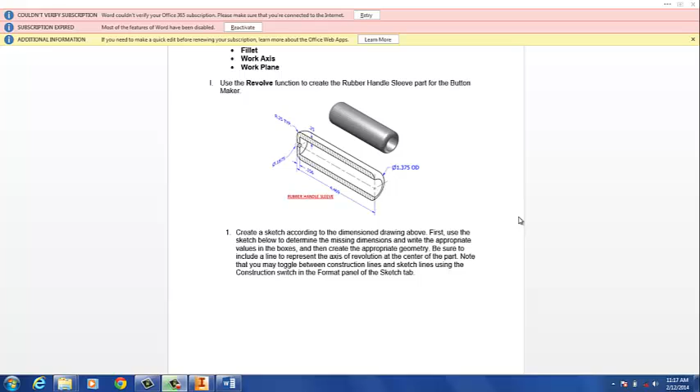Okay, today we're going to look at a tutorial to make the rubber sleeve handle. So I have the Word document here. I get a brief picture here, a cutaway drawing of the rubber sleeve. And then if I scroll underneath it, I get a 2D sketch with some dimensions on it.

So we have 0.156, 4.469, and then you can see there are 3 dimensions that are missing that they want us to solve for. So we're going to go ahead and make this sketch, including this construction line here, which will be the center line that we perform the revolution around. So I go into Inventor,

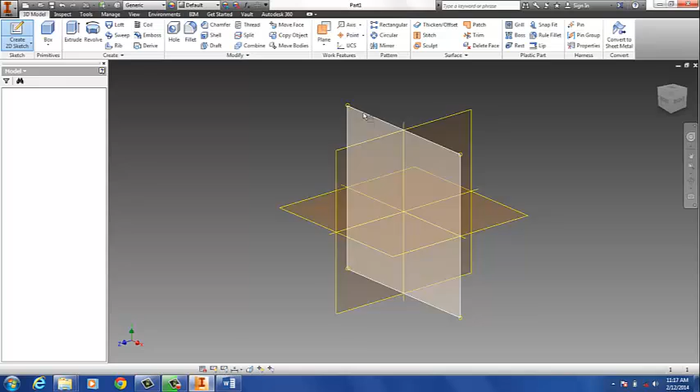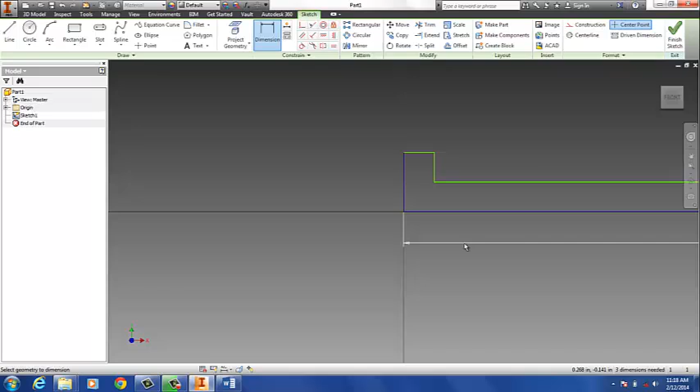and I'm going to create a new 2D sketch, and I'm going to use the line tool and just sketch the basic shape that we saw before. Alright, now I'm going to go ahead and put those dimensions on. So this one was given to us as 4.469. I'm going to hit the front button here so I can see everything. Alright, and up here, this was 0.156.

Alright, now I also need to put that center line for us to revolve around. So I'm going to turn on the construction tool and just put a construction line on top, or rather our center line for revolution. Alright, so there's 3 other dimensions I need to know. We'll go back to the Word document and take a look at those.

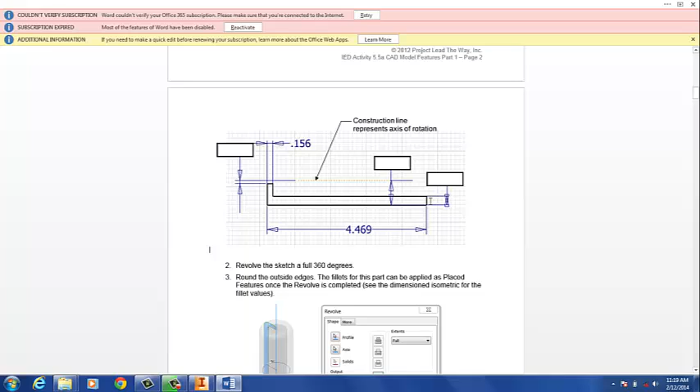I need to measure from that construction line to the top part here, from the construction line to the base of the drawing, and then also the thickness here. So I'm going to take a look at the other drawings, see if we can get those 3 dimensions. So the thickness you can see here is 0.25. Alright, so we're going to add that to the drawing. Then the other 2 I have to do a little math to figure out.

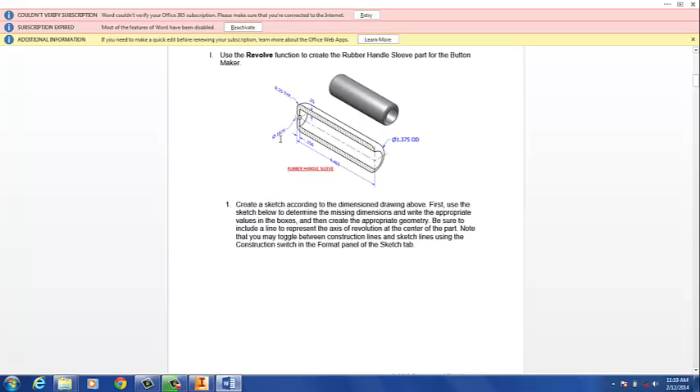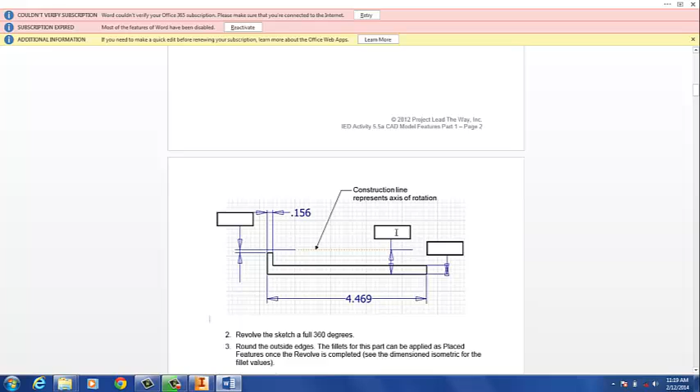Alright, so it's showing me the diameter here of this circle is 0.1875. And so what I'm looking at over here is basically half of the circle. So instead of using the diameter, I'm going to use the radius here. So it'll be 0.1875 divided by 2. Similarly, over here, that circle is what we would get over here. So we get a diameter of 1.375. So I'm going to do the same thing. I'll divide that in half for the dimension there.

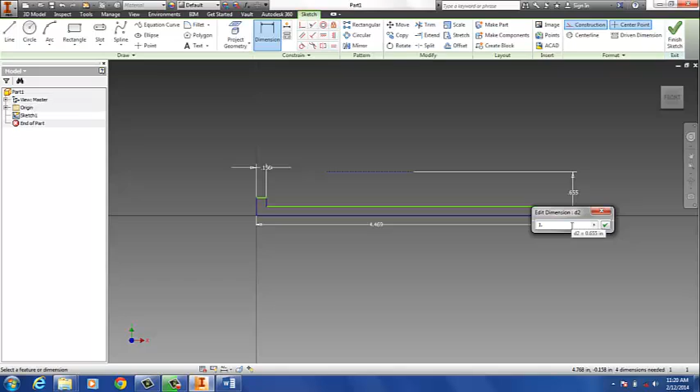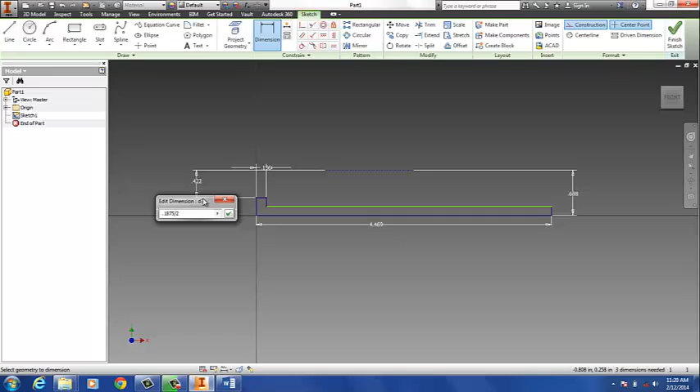All right, so dimension, let's go from our construction line to the base. That's going to sweep out a circle of 1.375 for the diameter. So we'll divide that in 2. And then I'll do a similar between the construction line and the top part here. Alright, so that sweeps out a circle of 0.1875 diameter, so I'll divide it in half to get the radius. And then the last thing I need is the thickness, which is 0.25.

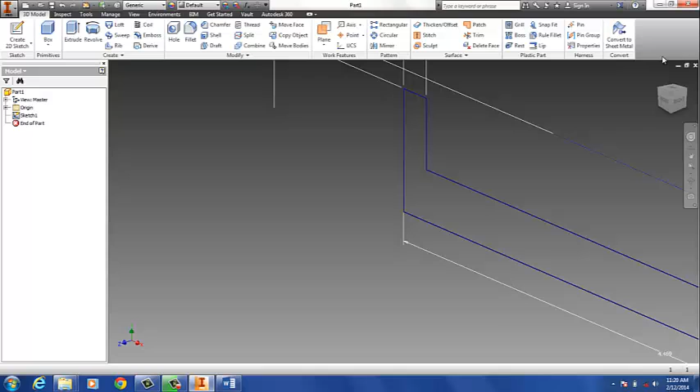Okay, so I now have the profile completely dimensioned, and I'm ready to revolve it, so I finished the sketch. We press the home button to zoom us back out. I'm going to select revolve. There's only one profile, so it selects that profile. I'm going to pull this menu down here.

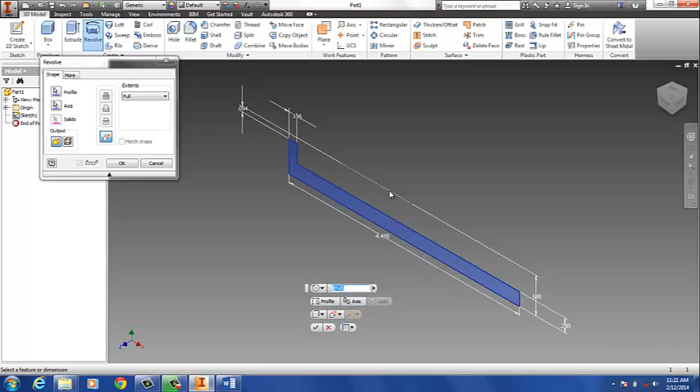Next thing we need to do is select the axis. You can see here it says axis. It's also highlighted over here. And that's why we put this construction line down. That's going to be our axis line to revolve around. Alright, and it generates that. I'll say OK. And we now have our profile revolved, and it gives us this cylindrical shape.

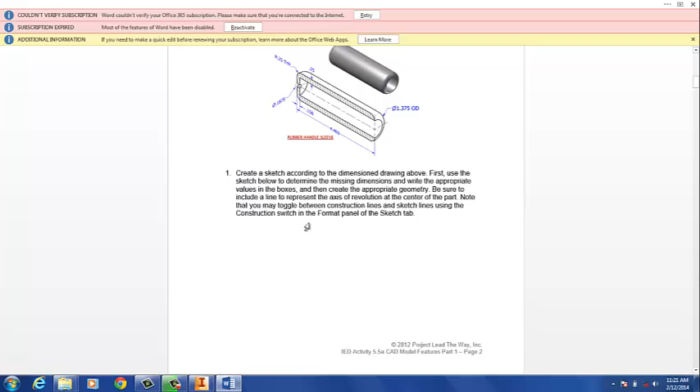Okay, we're almost done. We'll go back to the Word document. Take a look at the next set of directions. Alright, so it wants us to add the fillets to the edges, and it says we can see those on the drawing, and then to save the file. So if I come back up here, I can see I have a radius of 0.25. Alright, so I'm going to apply that to both the top and the bottom.

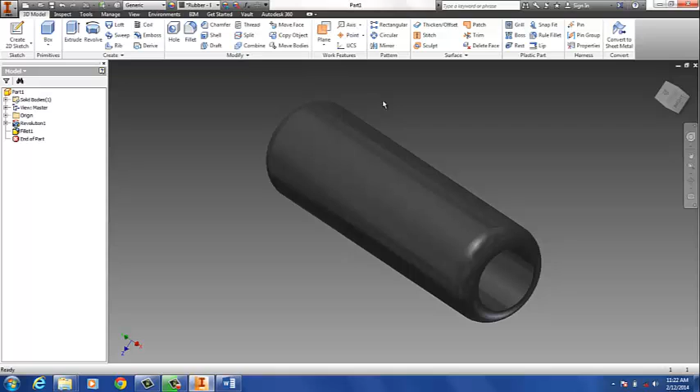I'll select fillet, 0.25, and that'll go to the bottom edge and the top edge. Alright, and now we are basically done with the part. As a final step, we'll change its appearance. And I'm going to select this black rubber. Alright, that's it for the rubber sleeve. You can save it and get it checked off.